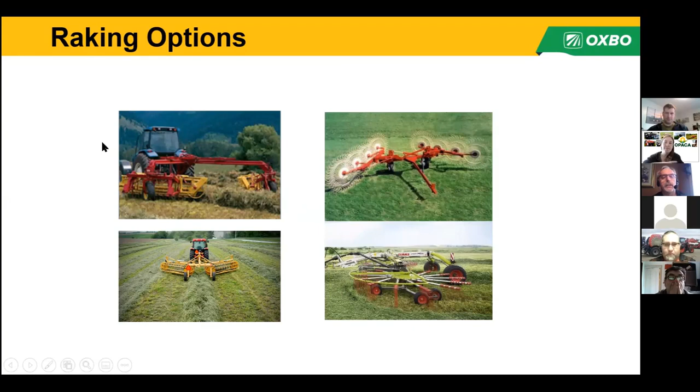So when we talk about mergers, if I can get my screen to move—there we go. Obviously, there's a lot of different raking options, a lot of different ways to rake hay, and most of these probably cost you less to purchase than a merger does. So what makes a merger worthwhile?

A higher nutritional quality of merged forage, basically by making a better quality forage for you. We can accomplish that by wide swathing, using the hay in a day concept, to get much faster and more consistent results than traditional windrows—better quality, no roping of the windrow. More weather control, hay in a day, preserving that forage and being able to harvest it at the optimal time, reducing the dirt and leaf loss, and we'll talk about that in just a minute.

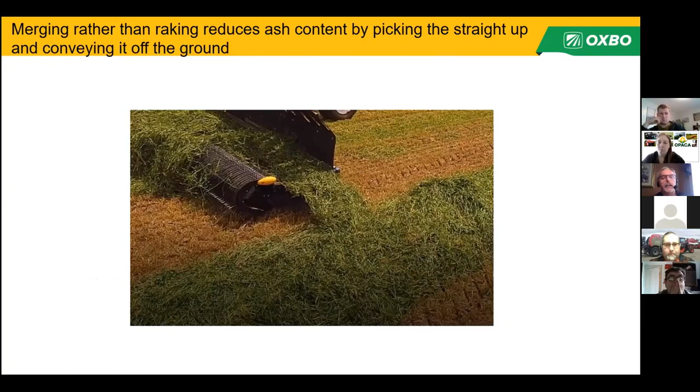Merging rather than raking reduces ash content, because we pick the crop up straight off the ground and convey it off the ground rather than dragging it across the ground. What does that do for you?

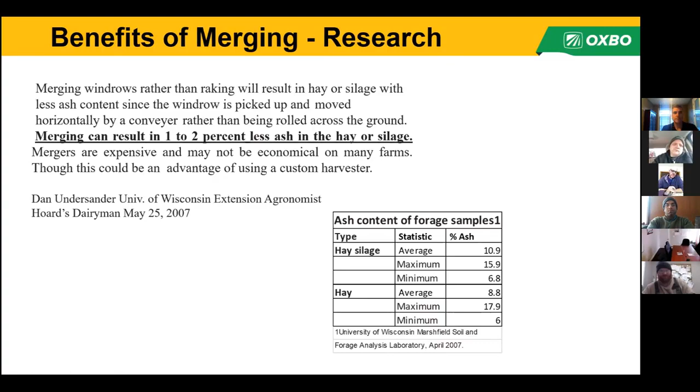Basically, reducing ash content. This is a study done by the University of Wisconsin talking about ash content in hay and silage. Their study showed that, depending on the type of rake you were using, a merger can reduce ash content by 1 to 2%.

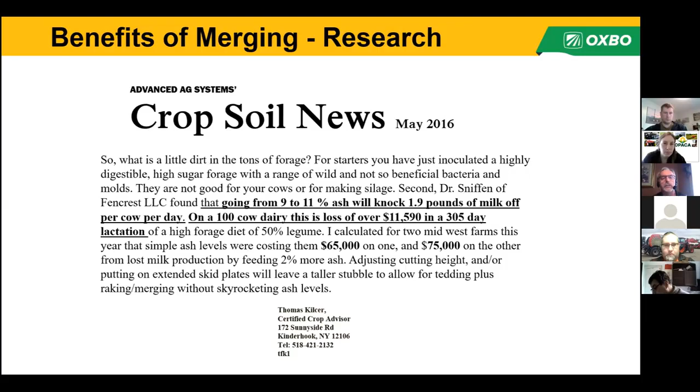So what does that mean in terms of dollars for you? This was a study done by Tom Kilcer—he was basically the inventor of the hay in a day concept—and they did studies showing that a 2% ash difference, if you went from 9 to 11% ash, knocks 1.9 pounds of milk production off per cow per day. When you start adding that up by the number of cows that you have, your customers have, that's a real big savings, more production. You can help your customers be more productive.

Obviously, just having a merger doesn't automatically improve your quality. You need to also properly operate and maintain it. Some of the things that we see: you don't want the merger pickup to touch the ground.

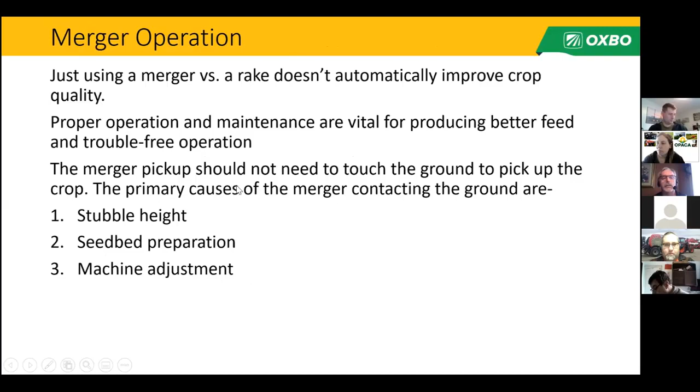Contact with the ground adds to your ash content. So we look at stubble height, seedbed preparation, and machine adjustment.

Leave a lot of stubble. Not only does it make your merger wear and perform better, but the hay dries better if it's up off the ground, and it promotes good regrowth.

Don't run the tines into the ground. The reason you spent the money for a machine to reduce your ash and dirt content is not to mention you can damage the heads also.

If possible, try not to drive on the hay with wide swathing. That isn't always possible, but when you push the hay into the ground, you can leave streaks into the field.

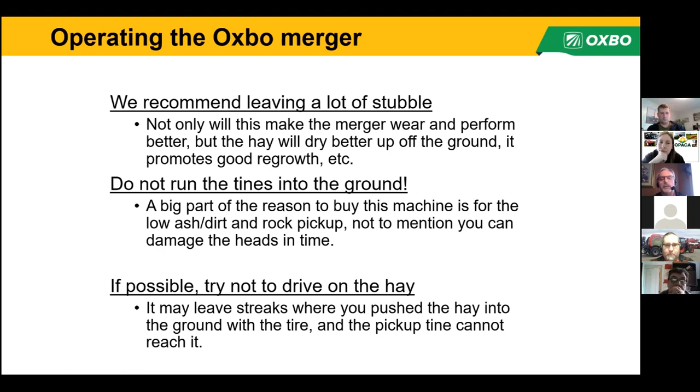Talk a little specifically about the Oxbo mergers, our 2300 series mergers that we introduced in 2018. Our goal was to improve the productivity of the hay harvest, to design a merger that had higher capacity to handle larger crop volumes. More people are using winter forages, triticale, those types of things, to go at higher speeds and improve windrow quality so you can increase the forage harvester speed also.

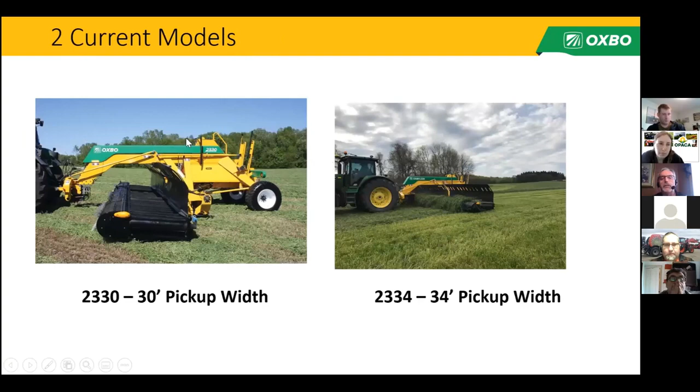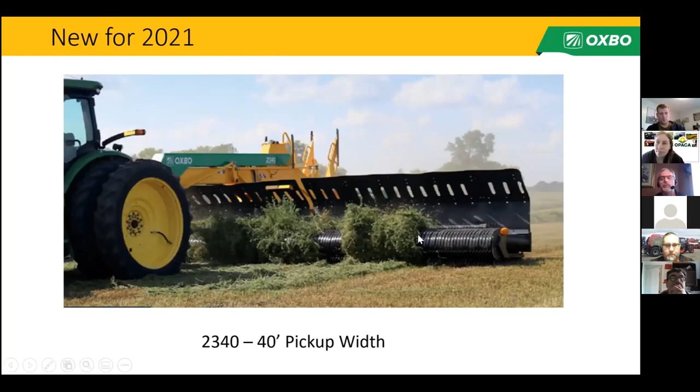Currently, we have the 2330 and the 2334, 30-foot and 34-foot. We just introduced, and some of you may have seen some of our information on this, our new 2340, 40-foot pickup that's available for 2021. You could talk to Delta about the new model.

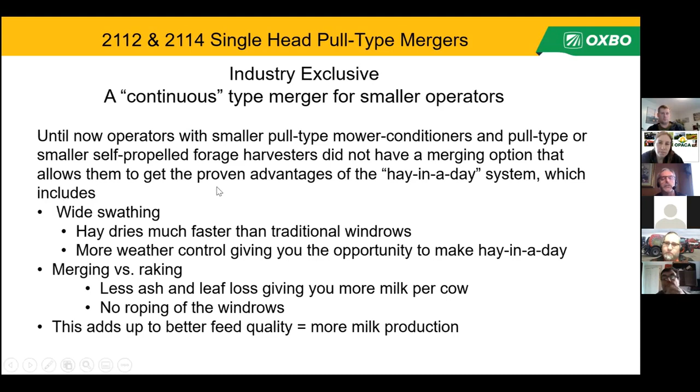We actually use all of the same components. We have a 12-foot pickup and a 14-foot pickup. As you see, the head looks exactly the same. Center swing chassis, so you can go left, right.

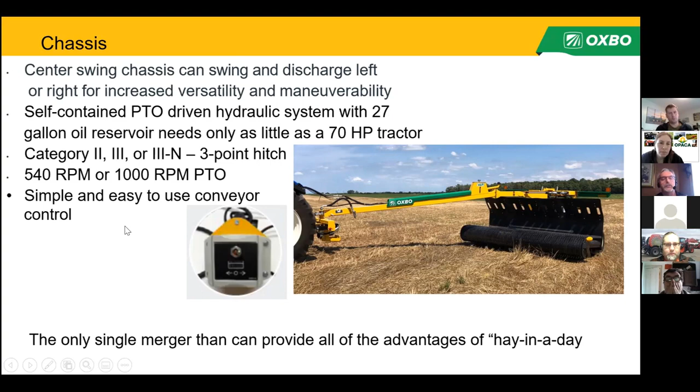A very simple switch control, so you can switch your conveyor left, right, or off. A very cost-efficient merger for smaller operations, or especially, as I say, some of the dry hay operations.

All of our machines feature heavy-duty drive pickup motors to handle that heavy crop. We use a split tine, rubber-mounted tines to handle the crop gently and pick up less rocks. Our cam profile places the crop further back on the conveyor so you get a smoother windrow.

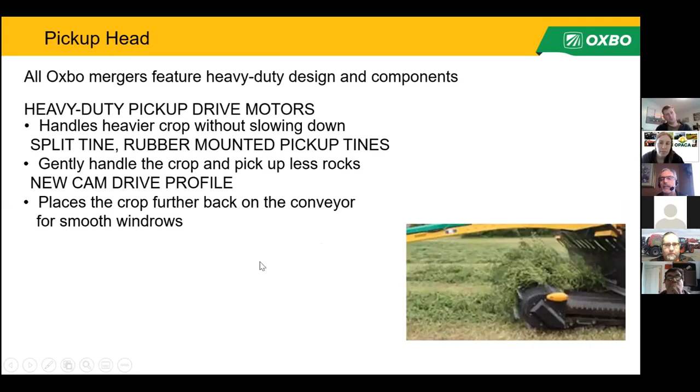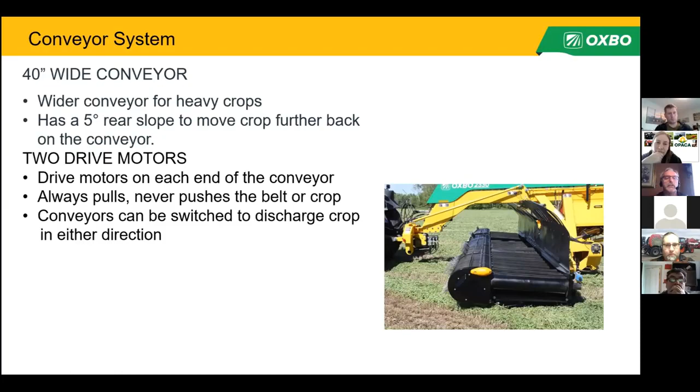We all have 40-inch wide conveyors to handle the heavy crop. We slope the conveyor back 5 degrees to move it back so you get the full use of your conveyor belts. We have drive motors on each end of the conveyor, so you're always pulling, never pushing the belt or the crop, and the conveyors can be switched to discharge your crop in either direction.

Why buy our Oxbo mergers? It's so simple. It's the original proven design, great reliability. We built them from the beginning for the custom operator, been field tested on thousands of acres. We do use a simple, proven mechanical rear wheel steering, which increases your maneuverability and follows your tractor.

In the end, if you're looking at value, the high demand for used Oxbo mergers has always helped assure trade-in values. Proven durability results in lower maintenance costs, simple design and components, lower parts replacement costs on belts and electronic components. Add it all up: lower maintenance costs, higher resale value equals a lower cost of ownership for you.

That's all I have. I certainly look forward to talking to any of you later, or if you have any questions later on, be happy to answer them.

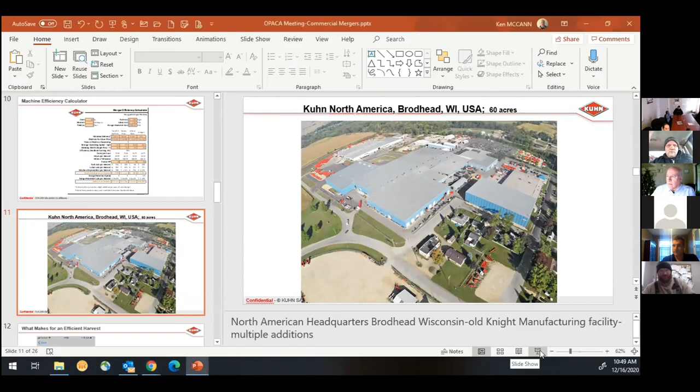Take it away, Ken. Okay. It tells me I'm sharing my screen here, but I can't see it online. Yeah, we can see it. You can go ahead and present.

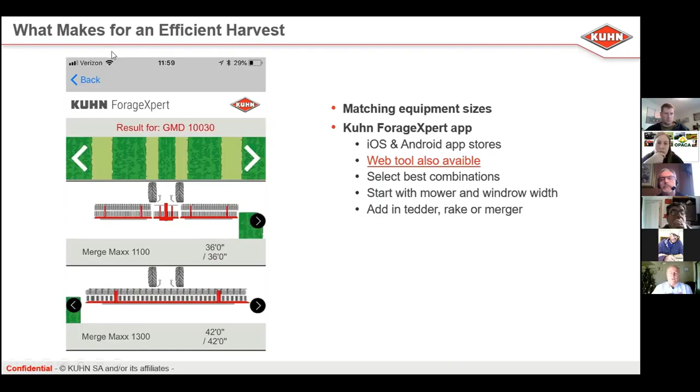One other thing I wanted to touch base with everybody and offer, this is a free app available through the App Store. It works for all hay equipment, Kuhn or other brands. It's really good to help size a tedder, a rake, a merger to your mower. Simple to use: you type in the width of your machine, move the windrows sideways to line up with the machine, and move the machines up and down to line up with the windrows. I'd encourage anybody, it's available in the App Store, it's called Kuhn ForageXpert. If we search ForageXpert, you can download it.

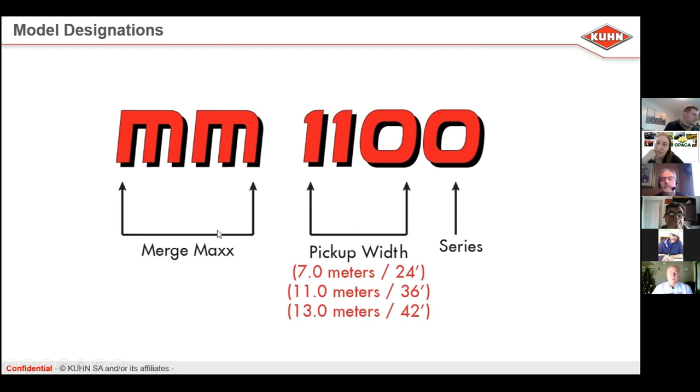So just to get into the Kuhn commercial merger lineup here a little bit, we have several models. Our model numbering system is common across the line. MM stands for Merge Maxx, then the first part of the number is width in meters, and the very last digit is the series. Now we're going through a model change first of the year, and that 0 will be switching to 1. I don't know a lot of details on the new models, but I'd be happy to talk about it in a breakout room.

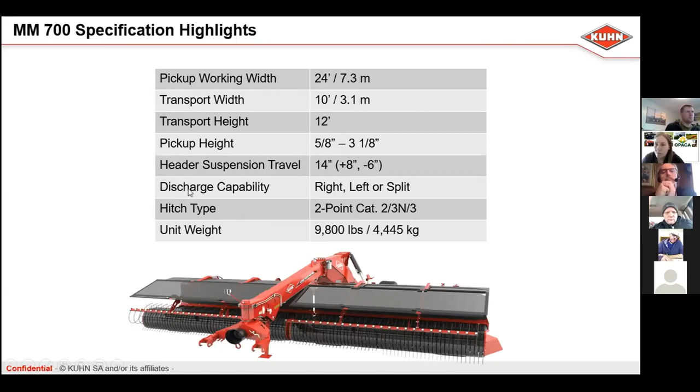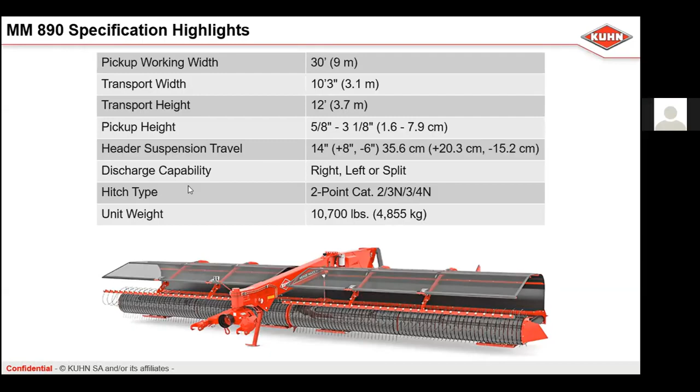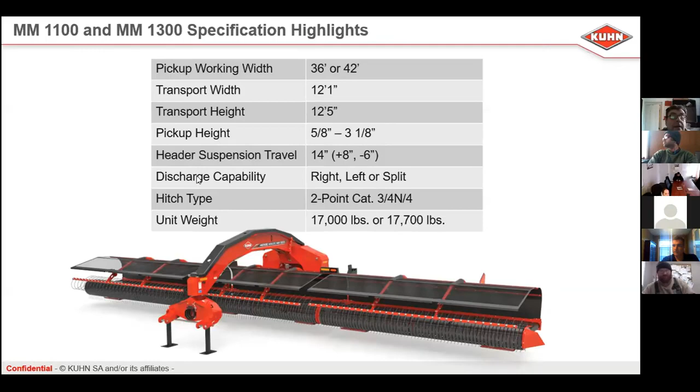So we currently offer a 24 and a 30-foot merger in a twin pickup style. The 24 consists of two 12-foot pickups, and the 30-foot is two 15-foot pickups. A couple of years ago, we introduced our bigger mergers, the triple mergers. The 1100 is 36 feet wide, consisting of three 12-foot pickups. And the MM 1300 was introduced last year. It's 42 feet, with a 12-foot pickup in the center and two outside pickups at 15 feet.

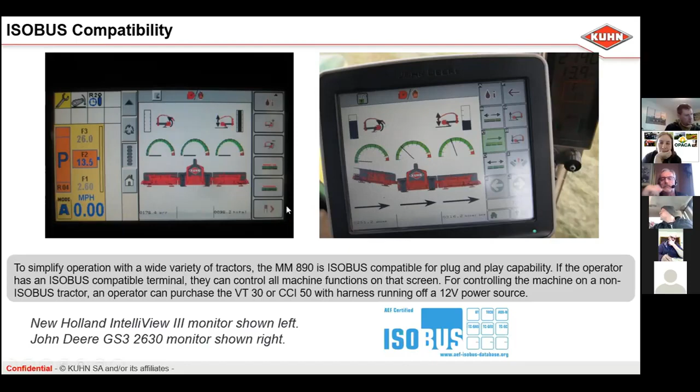All the machines with the new model number will be going full ISOBUS, so all the controls for the machine will be available on the tractor monitor. You won't have to have a separate control box in the tractor. I apologize if I keep looking to my right, that's where my notes are.

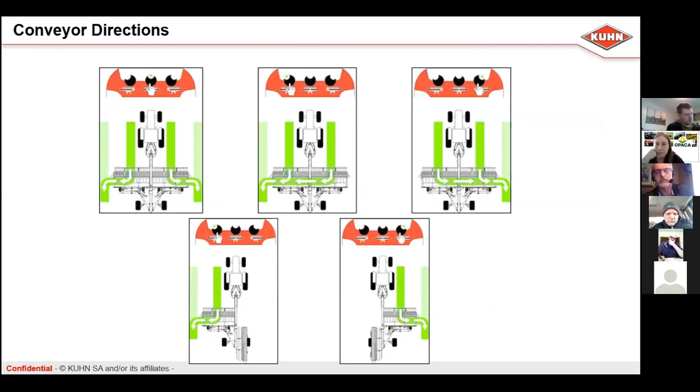This is just a diagram of our delivery options. We can deliver everything to the left, everything to the right, or run pickups in separate directions, one or two to the left and one to the right, whatever works. We can also operate our mergers with one wing up in transport position if we're working on point rows or you're in a narrow spot in the field.

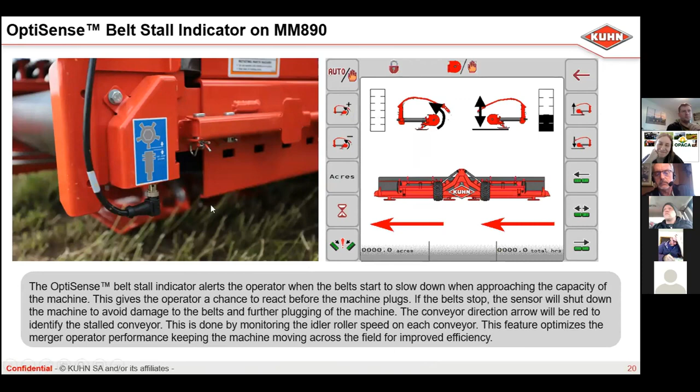The MM890 was our first ISOBUS machine, introduced last year. It's our 30-foot model, and with that we introduced a belt stall indicator called OptiSense. It's a sensor on the idler roller of the belt that detects when the belt speed starts to drop, indicating that you may be plugging the machine, and it'll start barking at you in the cab. If you don't pay attention to that alarm, we also have another option called cleanout mode that you can do right from the monitor, which lifts the wings up to headland mode and reverses the main belt so that hopefully you don't have to get out of the tractor to clear your plugging issue.

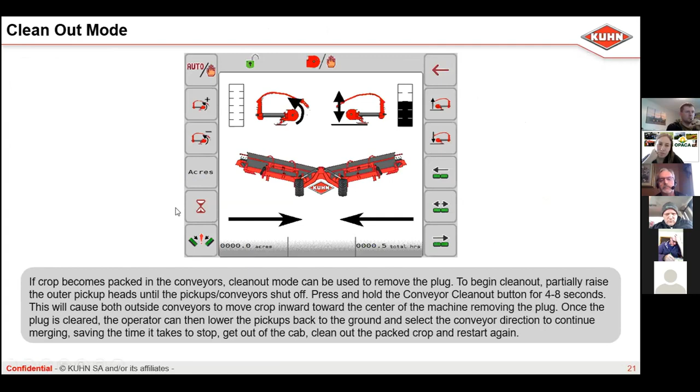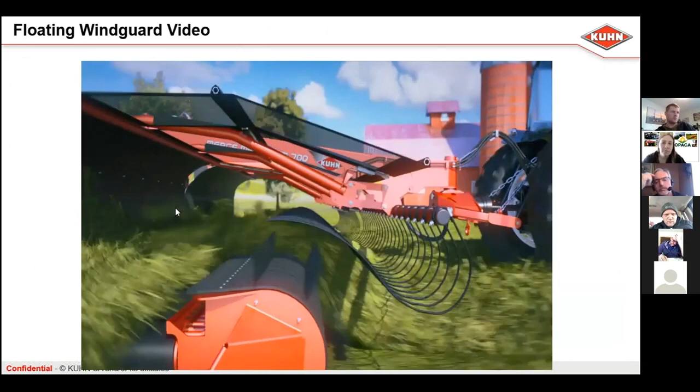This is one of the big features we like to talk about on our machine. It shows two things here: the netting on top for leaf retention, and our floating wind guard that creates a positive connection to the pickup tines. So we get a nice even feed into the pickup, which translates into a very nice fluffy windrow that increases the productivity of your forage harvester as you go up and down the field.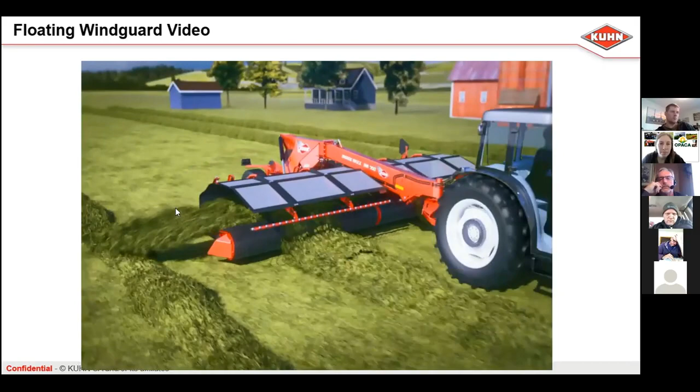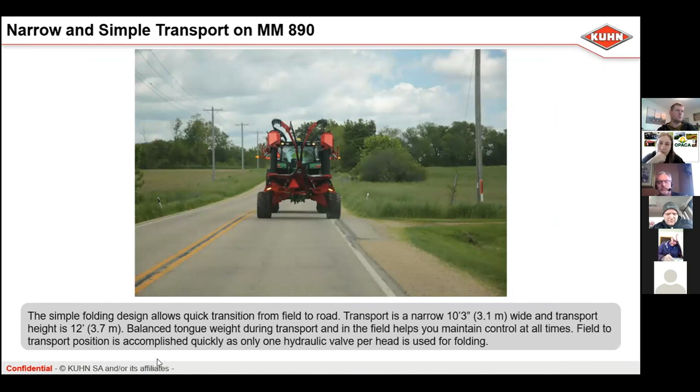Transport width is becoming more of an issue, especially with contractors that cover a lot of miles on the roads every year. The twin mergers, the 700 and the 890, fold into a 10-foot 3-inch road transport width, and our triple mergers will fold into a 12-foot 1-inch travel width. They use 10 gallons per minute to fold up the wings, and you can be in road mode in 12 seconds.

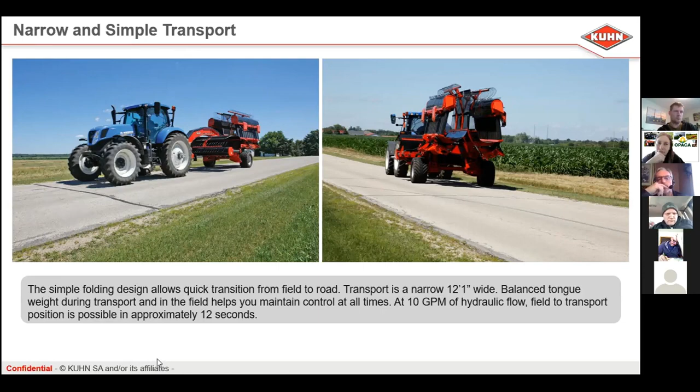And that's about all I got. Mel didn't even have to cut me off today. I had to turn your video off though, sadly.

Did it not work very good? No, the audio was cutting out, so I wanted to be sure we all heard you. But the presentation came through great. Thank you so much, Ken.

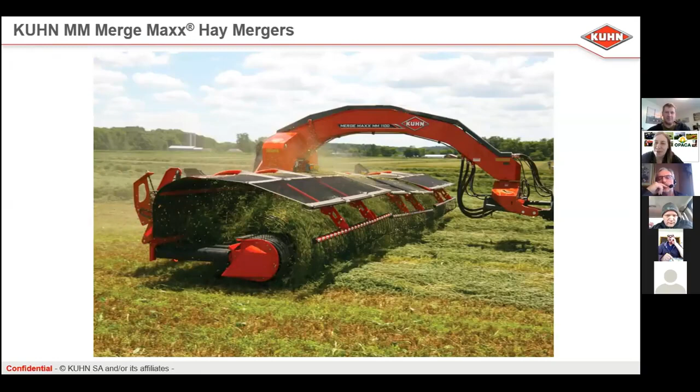No problem. Thanks, Ken. There was a question that came up about a ground contour, like the tracking system, the pivoting, oscillating of the merger. Can you speak at all to the system on the Kuhn, like what allows it to oscillate, or how many degrees, do you know?

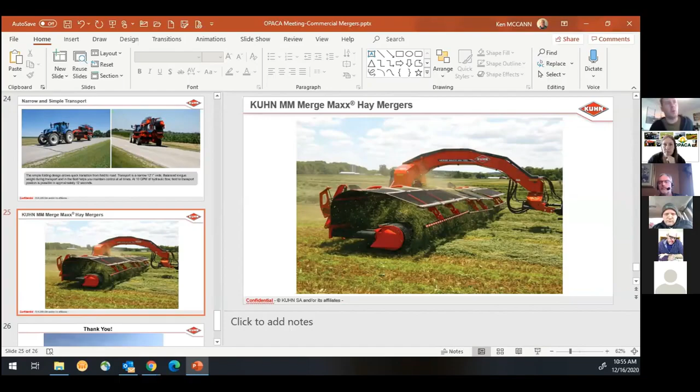Yeah, that isobus compatibility, that isobus system is a nice feature too. As an operator, I'm really glad that manufacturers are consistently coming out with that. Yes.

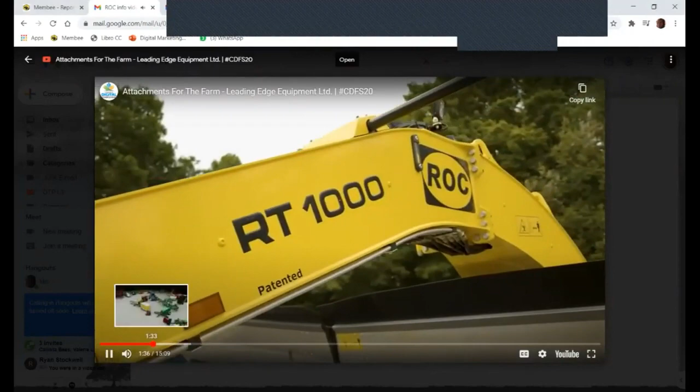Product specialist with ROC for Leading Edge Equipment. I'm going to be chatting a little bit about the ROC RT 1000.

Kirk, can you tell us a little bit about the ROC 1000? Yeah, the RT 1000. It's the perfect size for the dairy guys that are running the triple mower butterflies, the 10, 10, and 10. Matches up perfectly. You can put

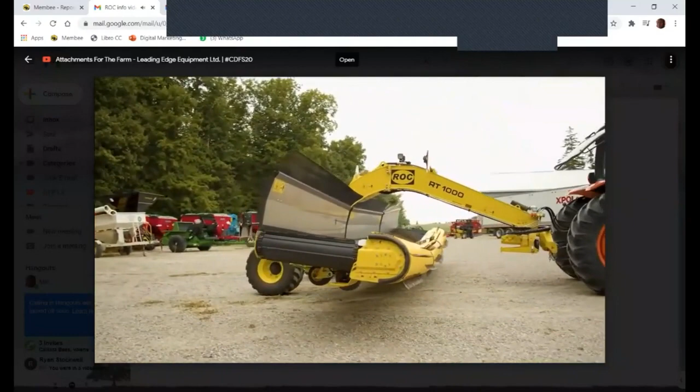7 rows into one. This unit here, we always bring them in with a 6-bar pickup. Some of the other competitors have a 5-bar. 6-bar seems to work better on lighter crop.

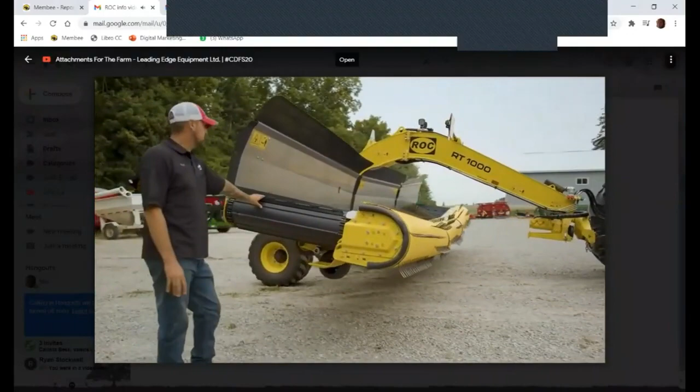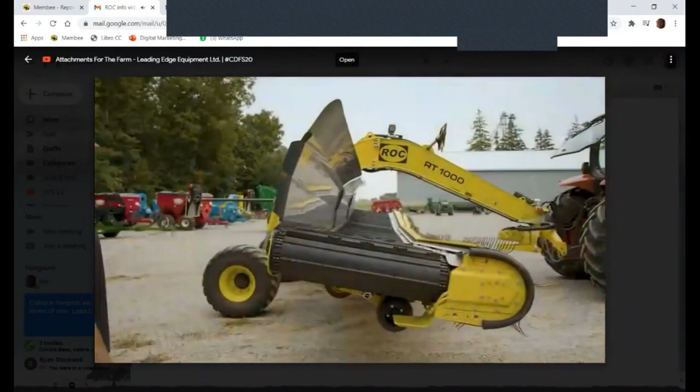Another great feature about this unit is the belt. It is not a single piece belt. You tear a belt, you pull out a piece, put in a new piece, you're done in 3 minutes, you're back going.

Another great feature about the RT, underneath you are running on pneumatic tires. You're not running on skid plates. Other competitors are running on skid plates, and in early spring when it's wet or when it gets super dry with first year hay, your skid plates will cut down through your new seeding and knock off new leaf.

With the tires it does not. You can also merge with 1 wing up or 2 wings up, depending on how heavy your crop is, how many rows you want to put into one.

So Kirk, how easy is it for the farmer to lift one side up or fold one side down? Is that an easy process for the farmer? Very super simple, easy process. It's electric over hydraulic. If you want to merge with 1 wing up, as soon as it's put in position, it does not run. The control box in the cab is super simple.

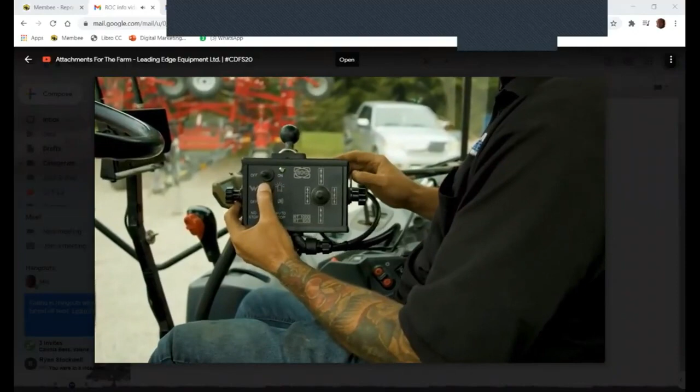Unit can be merged left or right, 2 belts left or right. You don't have to merge everything 30 feet to one side. It's a super great unit, best on the market as far as I'm concerned.

So Kirk, what sets this hay merger aside from other hay mergers in the market? This one, the other features that I already mentioned, plus it's a much more compact unit. It's not super long, easier to turn around on the headlands, and takes less horsepower. When you don't have it dragging around in the field and the skid shoes around the tires, it takes a lot less horsepower to pull it. This unit here, 30-footer, only 90 horsepower PTO to run this unit.

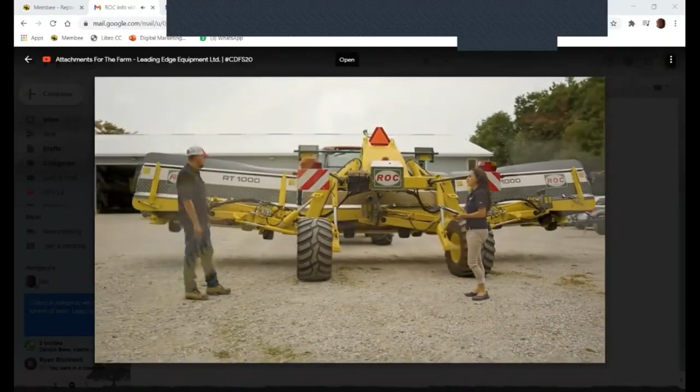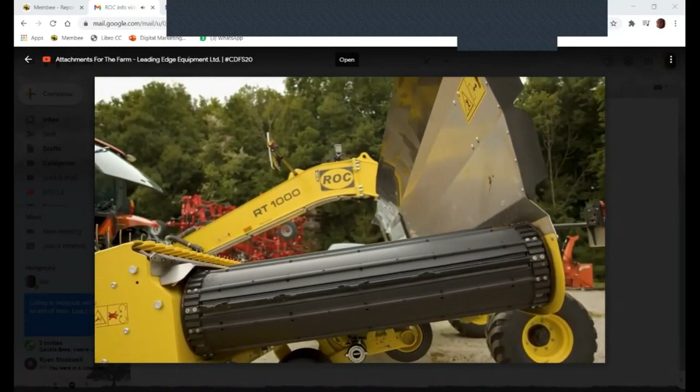Some of the other competitors cost quite a bit more. The RT1000 - what producer is this ideal for? This unit is great for custom hay operations, beef farmers and dairy guys. They're also now using them for merging corn stalks and straw. It's built for a lot of use every year.

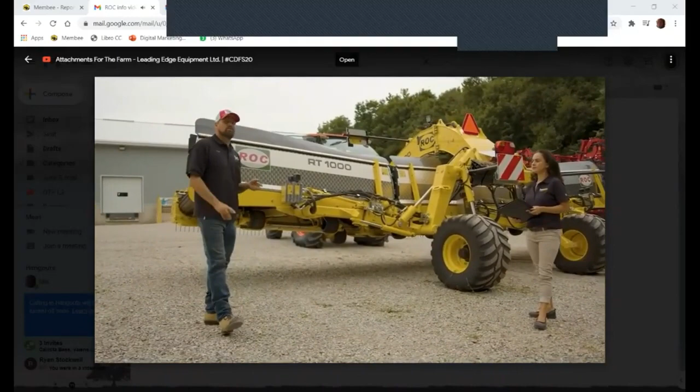So we're back here again with Kirk, this time with Kelly Tillage Systems. That's it, no more, stop. Excellent, thanks Kirk, did you have any more to add on top of that?

No, if anybody has any questions on sizes - obviously with RT, if you have a 1000, it's 1000 centimeters.

Thanks a lot, just a quick question.

Where are those built actually, the ROC? They're built in Italy. All parts and everything are here in Woodstock and also in Carroll, Michigan - there's a big warehouse there as well, but yeah, the main factory's in Italy.

They're definitely a relatively new product in Ontario. I've seen them around for a few years, looking on the internet and things, but it looks like another well-built machine. Yes, I have quite a few people looking for used ones, but I can't find any, so give them up.

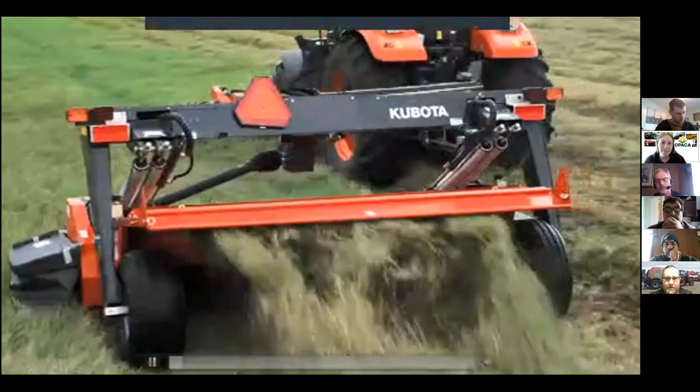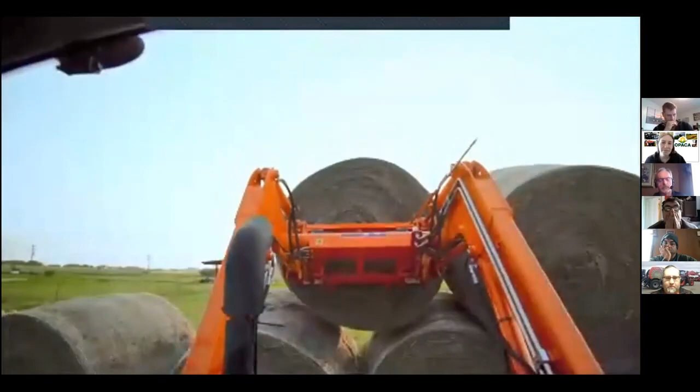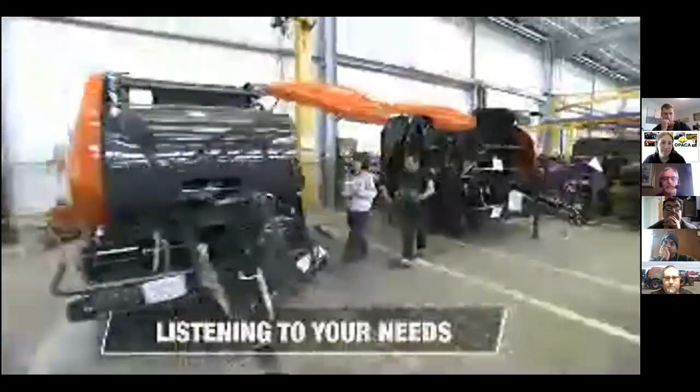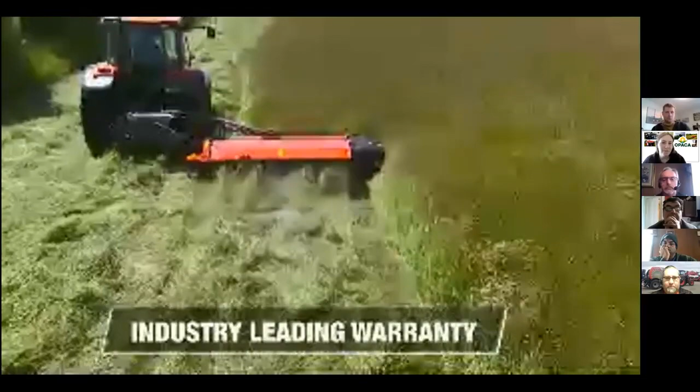Kubota hay tools are built right, built ready, and built on a strong heritage of innovative products tested and proven for over 100 years. We are building on our long-standing commitment to quality with a new 2-year standard limited warranty on all Kubota hay tools, and we're expanding our presence in Canada so we can be there for you when you need us, whether it's for parts, technical support, or new equipment. Our proud history of groundbreaking agriculture innovation spans more than a century, starting with notable inventions by Vicon and Kverneland in the 1900s, from the finger wheel rake in 1949 to the first rotary tedder in 1961 and the first disc mower conditioner combination in 1974. Today, under the Kubota brand, our approach to innovation is driven by a single purpose: to design, engineer, and build products that meet farmer demand and deliver results beyond expectations. Kubota hay tools are designed and engineered with the end goal in mind: delivering maximum productivity in today's hay and forage environment. Here in Canada, we are building a new, larger distribution center in Pickering, Ontario, and we've expanded our team of Canadian experts so we can better support farmers across the country. We're listening to your needs, from the day we dream of a new product to the day we deliver it and beyond. From disc mowers, disc mower conditioners, tedders and rakes, to balers and wrappers, our hay tools product line is supported by our strong network of dealers in your local communities. And now we're backing those products with a standard 2-year limited warranty that is among the industry's best. It's just one more thing we are doing to help your farm operation achieve the most productive hay and forage crops possible. Our strong heritage is built on innovating hay tools that are built right and built ready to grow with you, today and well into the future, so you can do your best work without worry. Kubota, for Earth, for life.

Oh my goodness, Travis, I want one. I don't even care what it is. Amazing video. I don't need to do any more pitching, do I? No.

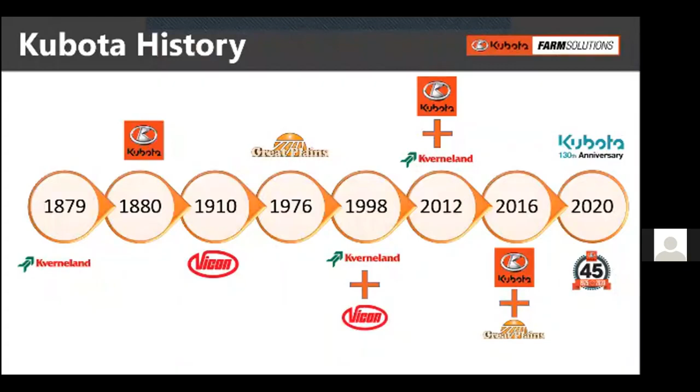On the rake line, here's a quick overview of our offering in Canada. Some of this is still available as a Kverneland brand - we have dealers still wanting to bring Kverneland stuff in because there's a legacy in that name. So if you're interested in Kverneland product, most of it's still available. But here's how our rake line breaks down.

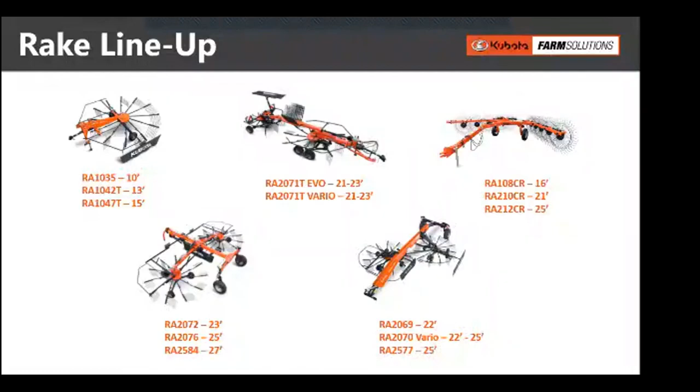We have 5 different offerings. We have our single rotor rakes varying from 10 to 15 feet. We have our dual rotor versatile rake, meaning you can rake side to side, 2 rows into one single row, with all sorts of configurations. It's offered in an Evo and a Vario model, working from 21 to 23 feet, depending on single swath or dual swath.

We also offer a wheel rake assortment, both 8, 10, and 12 wheel rakes, going from 16 to 25 feet. Those are built here in North America at the Great Plains manufacturing facility. We now also have center delivery and side delivery - center delivery brings the hay into the middle, making one large windrow.

We offer those in ranges from 23, 25 to 27 feet, with hydraulic adjustability to control your windrow width and operating width, as well as side delivery, which works in either a 22 up to 25 foot range. Some of these have a center frame that carries the 2 rotors, giving you the ability to do one large row or swath, bring 4 into one, or do 2 smaller windrows depending on what equipment you're feeding.

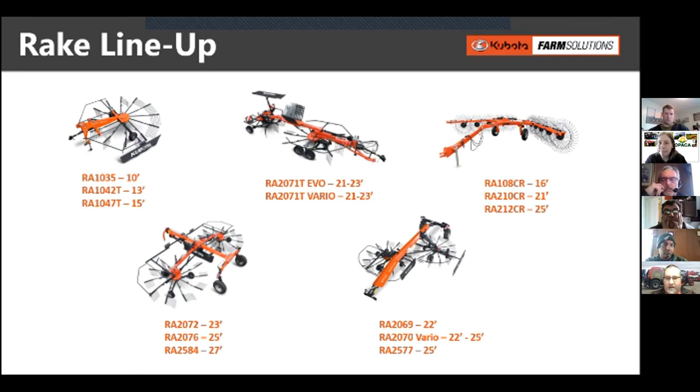So we have a wide variety of rake options depending on what you guys are looking to do, and I guess feel free to talk to me more about those in our breakout room.

There's also a complete tedder lineup that we offer. They range from 4, 6, 8, and 10 basket tedders - that's what the 4,000, 6,000, 8,000, and 10,000 series means. They vary in working width, with the 4 basket being a 17-foot model.

There's what we call a trailed machine, where the wings fold in behind or beside each other to get a narrow transport width, ranging from 27 to 36 foot working width. Then we have a carrier frame, where the wheels fold down behind the tedder and carry it either over the headlands or down the road. We offer those in 24, 29, and 36 foot working widths.

And then we also have the really big one, a 10 rotor tedder up to 45 feet working width.

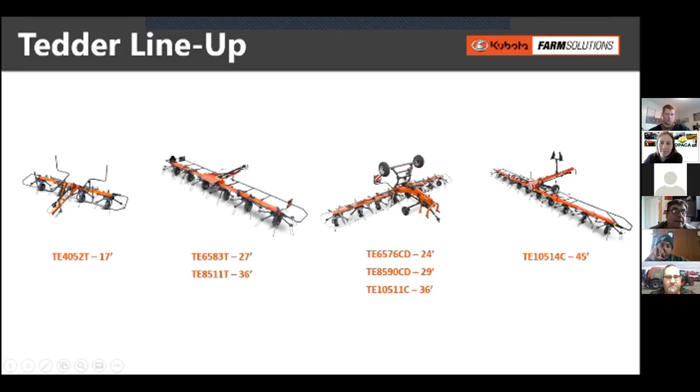So we do have a lot of versatility and flexibility as far as offering. Again, these are all Kverneland built products that have stood the test of time, and they're very well tested and well known. So just to give you a quick and dirty overview, I welcome chatting with you in our breakout room if you have any more questions regarding this equipment. Feel free to reach out to me at travis.grube@kubota.com if you have any questions. Thanks again for giving us the opportunity to talk about our product offering.